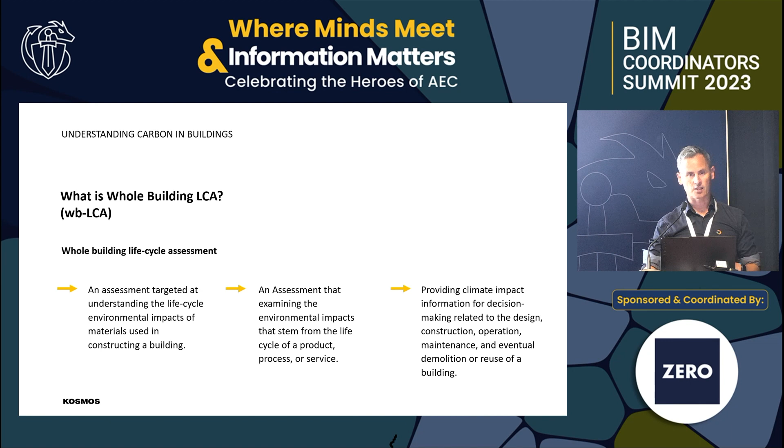And the why is always important. So why are we doing this? And it's because the construction industry is quite a dirty process. You know, we're taking raw materials out of the ground, they're going through heavy processing. It's energy intensive to do that. To change a material from an iron ore to a steel beam is intensive. To crush stone to make concrete is incredibly intensive.

And so buildings and their use is incredibly intensive, as Matthew had pointed out earlier. So we're trying to understand that at a building level. And by understanding that, we can pinpoint the hotspots. So where have we opportunities to improve? And, you know, will we have buildings that are using certain materials where it will not be tolerated by the clients or the funders, that those materials will have such a devastating climate impact?

So how do we target certain elements of the building in order to improve that building's impact on the environment and thereby the reputation of the client company or the investment company? And this is how, by understanding the building, by understanding what numbers we're landing on, we can get better scores in our LEED or BREEAM badging, but we can also inform decisions.

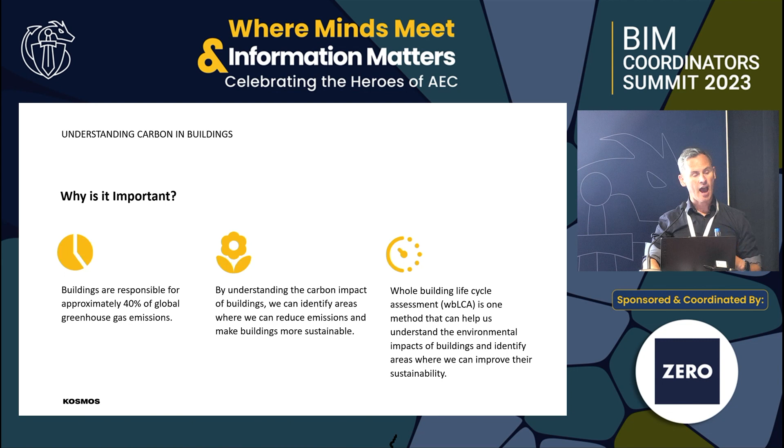So we can look at the difference between two products and pick the most environmentally sustainable one, just in the same way as we would compare two materials and look at their fire rating. We want to do the same with our materials for sustainability, and we want to see that that number has come from testing and it's credible.

So, I'm going too fast here.

12 minutes in. So whole life carbon. So we talk about the whole life carbon being the cradle to grave of the building, the 50-year life of the building. And we break that down into the upstream carbon, being all of the materials that are in the building, and the downstream carbon, being the maintenance and replacement. And that's the carbon that's involved in just getting a building built and getting that building to be able to be run through its life cycle.

So in the 50 years of a building, before you turn on the boilers or the chillers or the water, you've already used at least half of the carbon budget for that building. The other side of it then is the energy in use for 50 years. And you can see for some buildings this is 50%, but you go to somewhere like Denmark where they, even though they have a very green grid, their building embodied carbon is still quite high. So they can have embodied carbon that's 30% of the overall energy. But when we compare that to buildings in Ireland, it's a fraction. It's only about a third of our footprint.

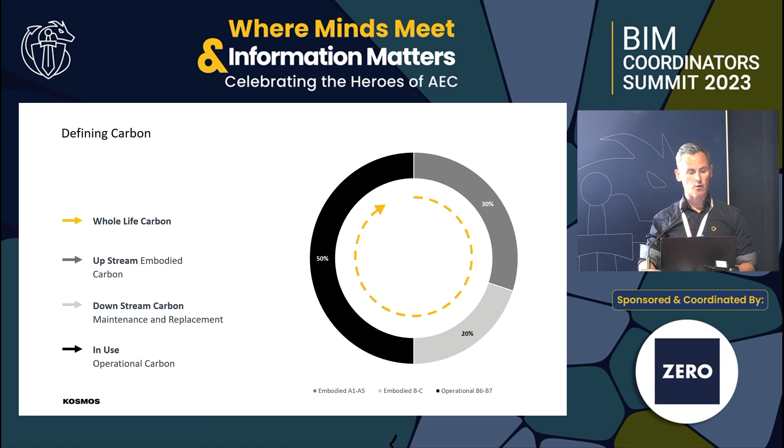What's happening here is carbon is becoming a metric for investors, and they want to see that the carbon that they benchmark for their buildings in Holland, in Belgium, in Germany, they want to see that their Irish buildings are comparable with that, their UK buildings. Now, London has this in planning, so we do have to be more cognizant of where the carbon is hiding in buildings.

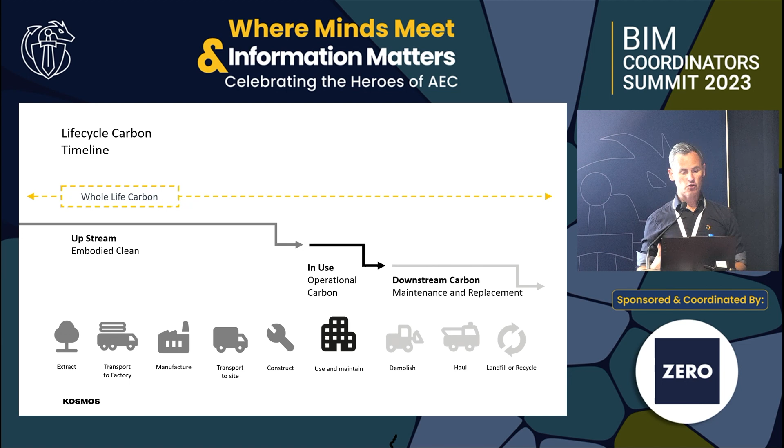So when we talk about this whole life cycle carbon, and we look at the embodied carbon, we're looking at the embodied carbon upstream in the process of generating those materials, bringing them to site and installing them on site. And that can be almost as significant as the energy in use during the life stage of the project, that 50 years. But we also have to consider the downstream, which is the maintenance of the building and the replacement of the building. And we have to understand at an individual material and product level what the impacts of these are.

In terms of M&E, M&E is very difficult because you need to understand how many times a product has to be replaced over those 50 years. Does that air handling unit have to be replaced every 20 years? And does it have to be degassed every 5 years? And what is the fugitive escape gas that comes out of the unit when it's serviced? So it's a difficult process to do that.

So in terms of life cycle assessment, when we look at this as a kind of a whole cradle to cradle approach, a whole circular approach, we have to understand where the materials are coming from, what our construction process is. So we have to engage our supply chain, we have to have our contractors on board. It's a whole stakeholder approach, it's a collaborative approach. We have to look at even the operation side.

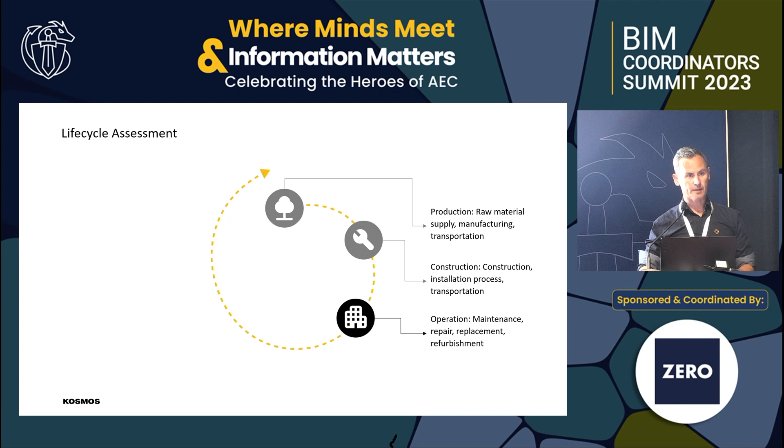There's no point building a green building and then having, you know, as we had in schools, the janitor running the building and not understanding the management system for that. No, it can't just be built as a green building, get a LEED Platinum, and then nobody cares about it.

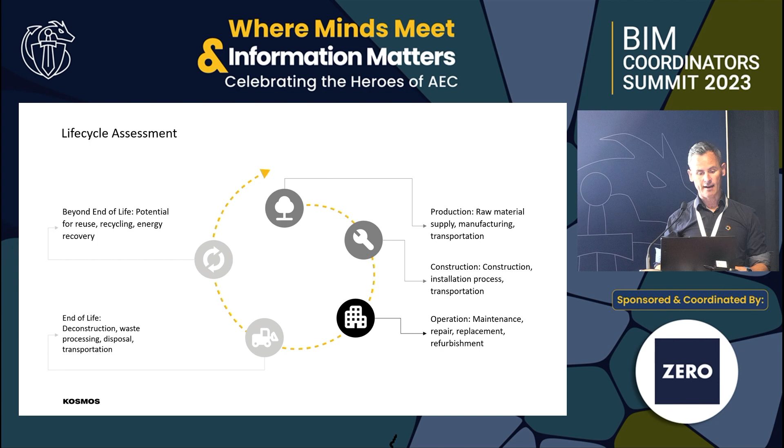The life cycle is important. But also, the system asks us to count what happens to the materials at the end. Do they go to landfill, or do they have a life after that? Can they be repurposed? And that's really the opportunity is, okay, we can use steel in our buildings. It's a heavily carbon-intensive product, but it can have a life after that.

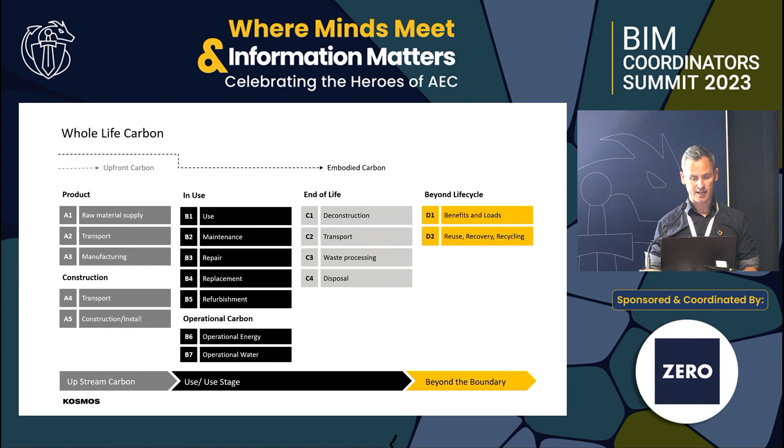So when we look at whole life carbon, we've got these 20 boxes that have to be filled with information, and each one of those would have 20 to 200 data points. So it's very difficult. We have a huge challenge in how we count carbon. And as we said, we can't do it alone. So quantification is important, and that's really where the cost aspect comes in. That's really where the metrics come in.

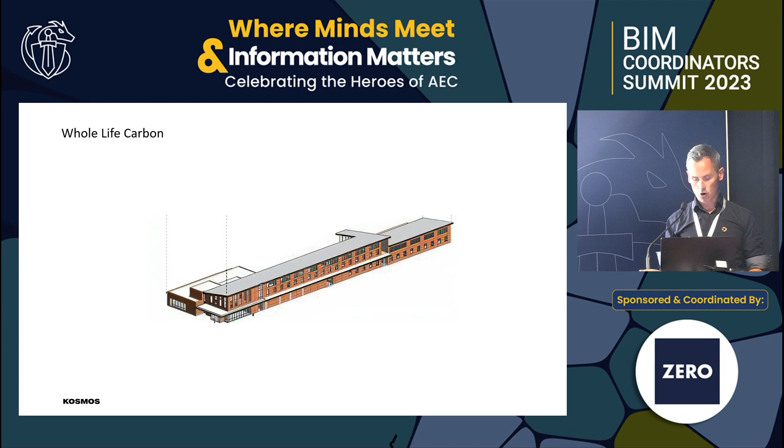So when we look at a building, we're looking at the whole life of that building, but we have to break it down into its elements and systems. So we're going to report on ICMS, and we break it down. So we have our whole building in terms of its materiality. We look at the heaviest materials, which is the structure. So 40% of this building is made with concrete, your substructure, your superstructure, your secondary steel.

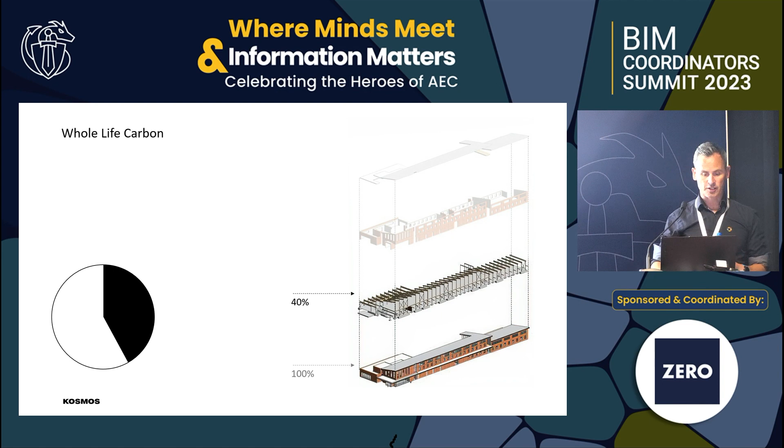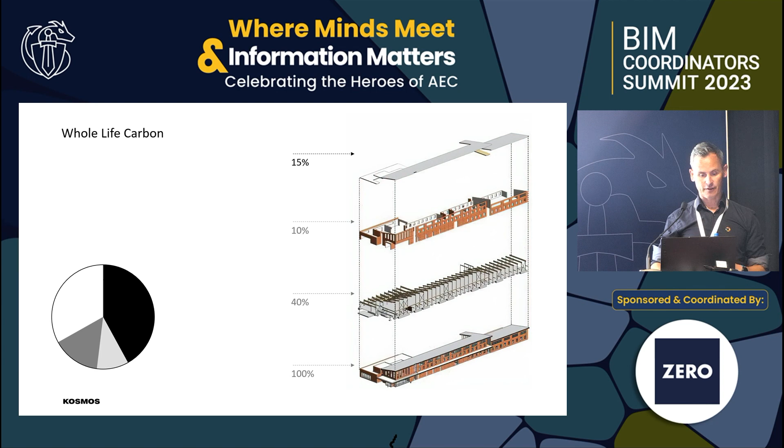Another 10% on top of that is your envelope, your facade, your windows, and then we have a roof. It could be a green roof, it could be quite heavy. And all of a sudden we have 65% of our building just in those 4 elements. But then we have all the other stuff that goes with that. The MEP and glass sometimes can trip you up. It can be quite carbon intensive relative to its weight. So we need to be accurate.

We need to make sure that if we're giving a number for carbon, that if 2 assessors work out that carbon number, they come up with the same figure. To date, it can be 50% out or 200% out. So just like BIM, we need to define what information is needed and when, and what level of detail. And we have to acknowledge that at some stages of the design, the information just isn't available, and we have to use averages or approximations.

So why are we doing this after all? What is the client's objective? Is it for disclosure, or is it just to tick a box? Is it just a baseline to get to the starting line, or is it beyond that?

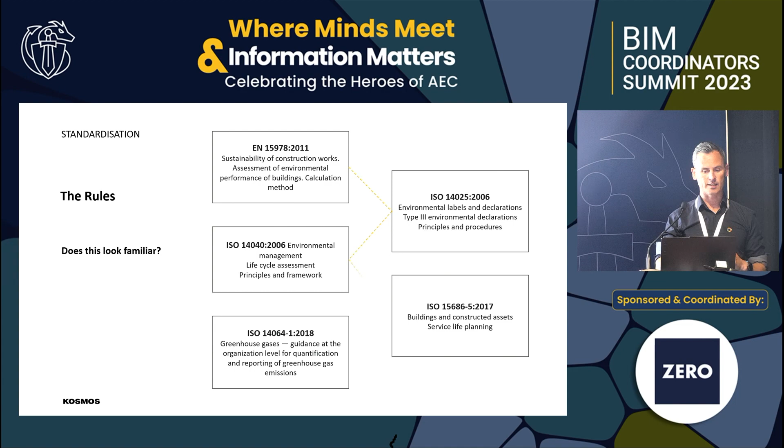We can digitize, we can automate, and in future we can get better at doing this. We can pull information from models and digital bills of quantities. So there's a lot of standards out there, but they can be a help or a hindrance. We have our ability to use digital models to extract information from digital models.

And you can't give a presentation at a BIM conference without having a spinning 3D model, and I'm doing my best to make a balls of that. But it actually took ages for someone to put this together. So

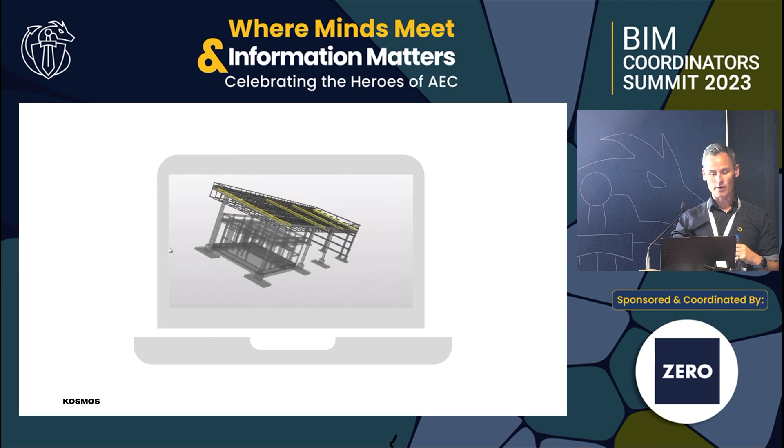So anyway, we can pull information on certain aspects of this and bring those quantities into our carbon model. So that's fairly important to do.

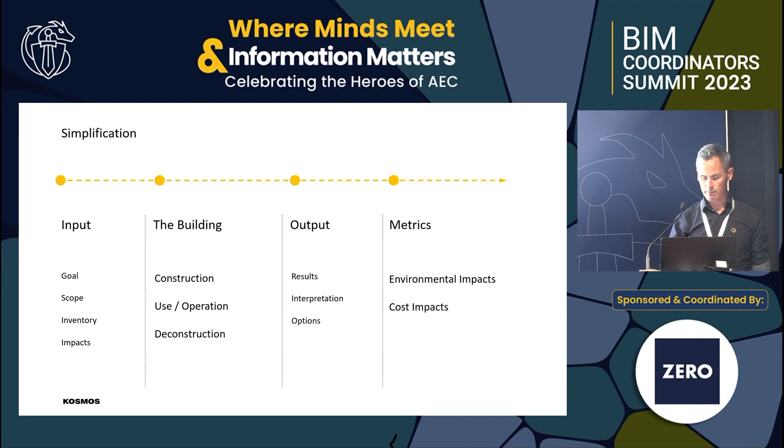And you have two outputs, right? You have your environmental impact and your cost impact. They're not different. They're one and the same thing. Cost and carbon are going to increasingly be seen as one and the same thing because there's a close correlation between them. And that's really the Danish experience, because the Danes have been doing this for years. So it's like, Denmark or Carlsberg don't do LCA, but if they did, it would probably be the best in the world. Well, Denmark has been doing LCA, and they started in 2014 with voluntary standards.

Then they brought in a toolkit. Then they brought in their draft regulations in 2018, and then they tested their benchmarks against the industry. Then they brought in voluntary benchmarks, and now they have mandatory benchmarks. Can we learn from that? Can we short-circuit it by doing that? And we can, and the Irish Green Building Council are looking at a standardised approach to this.

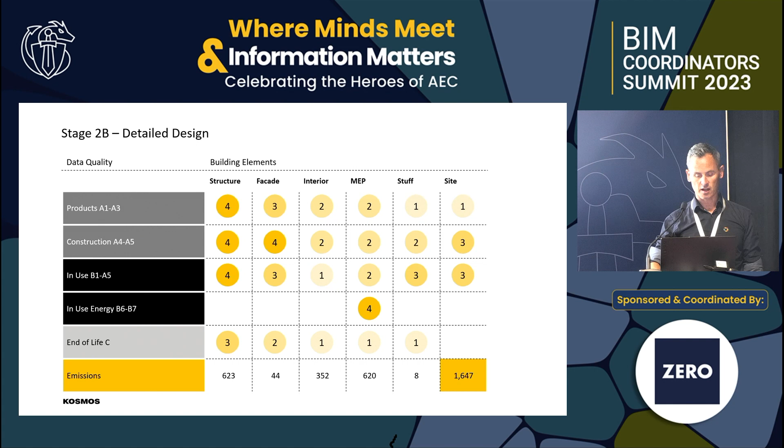We can put a scoring system, so we can say, at this stage, moving into stage 2B detailed design, we've got really good information on structure, and we're not too bad on facade. But as we go through the elements, we're not doing so well on interiors or MEP, and we're not doing great on end of life. But overall, for this stage of the project, we've a good score. We've 3 out of 4. And as Meatloaf would say, 3 out of 4 ain't bad.

So, having a plan is what's important. Start early, get those easy wins, get everyone on board, keep the message simple. Utilize the processes that are there. We've all been using LEED and BREEAM for years. JV Tierney lads there know that full well. And carbon is becoming the new metric. Just like we turned energy into BERs, and all of our clients are so familiar with BERs, we have to do the same with carbon. But we have to do it now, okay?

So the takeaways are, okay, we have to understand carbon. We have to look at the toolkits that our friends from Zero have done, and work with Matthew and them to make sure that we all have a shared understanding of climate and carbon and net zero. But it has to be accurate and consistent. Our clients have to have trust that if we say that a building has an embodied carbon of 800, it has that. The contractor isn't going to come around and say, you've actually given me a building that's 1,200. It's going to cost you $1 million to get this down to 900. So we have to have familiarity and trust around that.